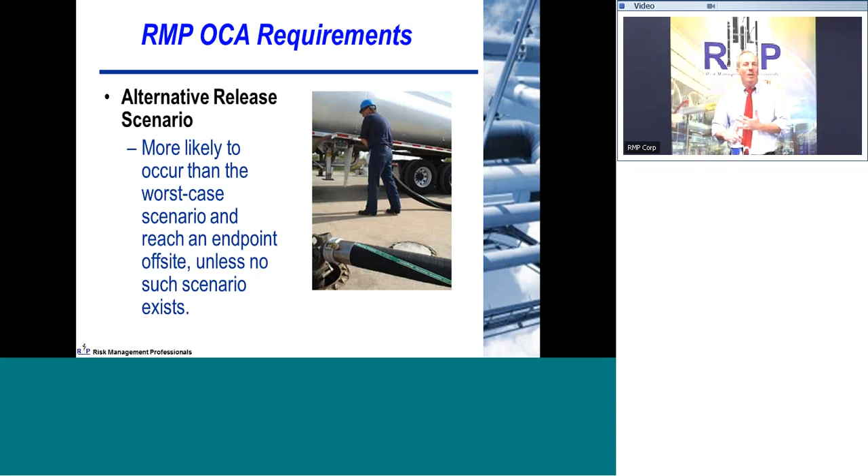So let's look at some of the specific requirements. What you're trying to do is really look at off-site population impacts. As you recall, process safety management is a requirement promulgated by OSHA, and it focuses on safety of plant workers. EPA's risk management programs and the state accidental release prevention programs focus on protection of the community based on EPA's jurisdiction and the other states' jurisdictions of protecting the community.

So the key element is determining these off-site population impacts. You identify a circle of concern, or how far out that impact can get, and then you estimate the population within that area. It can include residents, institutions, parks and recreation areas, and major commercial office and industrial buildings. Use of the most recent census data allows the population to be estimated.

And you're not supposed to analyze it to the individual. You don't have to drive around and look for daycare centers in your area. This is meant to give the regulator and you a perspective on what those impacts might be. And of course, the census data, the software that provides it, allows you to estimate to 2 significant digits.

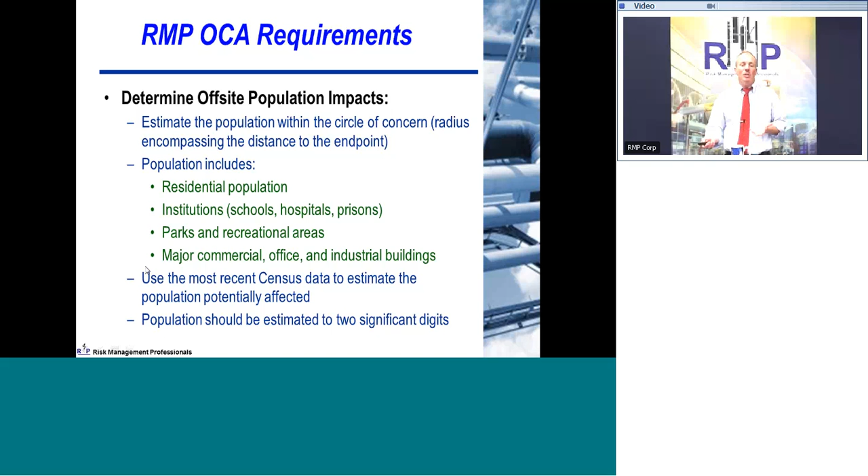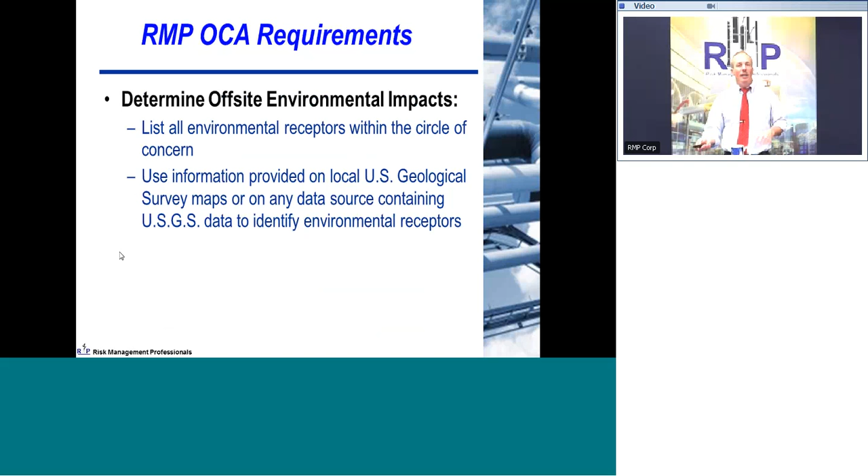That's a requirement. So as part of the determination of these off-site environmental impacts, you want to also identify environmental receptors. You can use information provided on local USGS maps or any other data source that gives you that kind of information in terms of environmental impacts. So you're looking at off-site population and off-site environmental impacts as part of the overall jurisdiction and responsibilities that the EPA and the state programs have.

Now, how does that impact with hazop studies? Again, all these come together—they're not meant to be individual, distinct, and disjointed programs. The hazop study facilitator, as they're doing these things, needs to understand consequence analysis.

It helps you identify important hazop study scenarios. If you're taking a team of 20 people running through it, and as a facilitator spending a lot of time and resources analyzing something that has just an operational blip on the process and may result in a few thousand dollars loss, that's not something you want to spend all these resources on. So understanding basic OCA concepts is super important.

The hazop study can also validate the kind of off-site consequence analysis scenarios that you choose, especially for the alternative release scenarios. Looking at things and having the team validate and say, oh, this could credibly occur during the life of the facility, we need to make sure that's properly analyzed—this can help you pick out and prioritize the 1, 2, or 3 scenarios that you might want to analyze as part of your OCA for the

alternative release scenarios. And also as a facilitator, although I've heard some facilitators go by the, gee, I'm just a facilitator, the team needs to understand what's going on—I don't agree with that. The hazop study facilitator needs to have a good technical basis to guide the team, to know when the team is going in the wrong direction, and understanding the chemical process, general process issues, and also off-site consequence analysis phenomenology really helps the facilitator do their job properly.

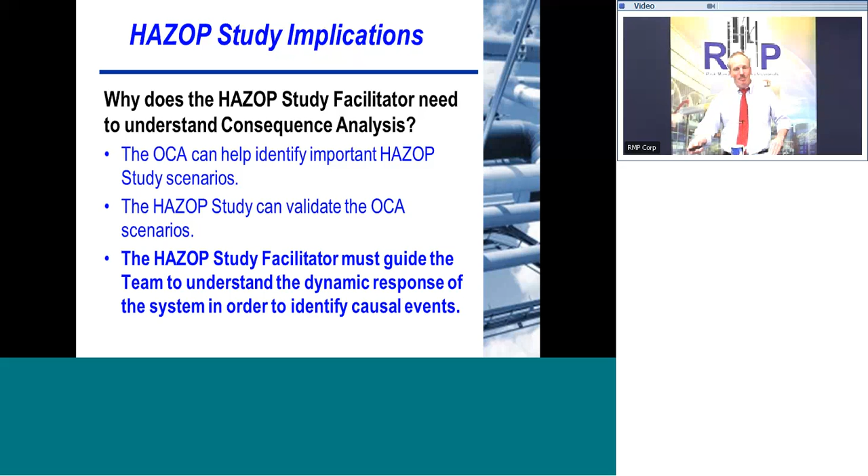When you're facilitating, you really need to be thinking about how does this scenario propagate, or does the team properly understand the ultimate consequences so that they're risk ranking it properly. So let's talk about general OCA modeling parameters.

When you're looking at toxics, you're looking at basic endpoints, or concentrations, levels of concern—we talked about that earlier. Toxic chemicals like ammonia, hydrogen sulfide have a certain amount of milligrams per liter, parts per million, different ways of representing concentrations that can cause potential health impacts.

The toxic thresholds that are chosen by the EPA are usually ones that don't cause an immediate fatality. Usually they're things that if somebody is in an area and gets exposed to it for an hour, there's a certain impact. In most cases, it's an impact associated with impeding their ability to respond or evacuate.

So that's what's picking and driving these concentrations of concern.

For flammables, explosions can yield overpressure events. An overpressure of 1 psi is a limit that's often chosen to have an impact, and we'll talk about that in a couple minutes. The radiant heat or thermal radiation effects, a radiant heat level of 5 kilowatts per square meter for 40 seconds is a typical threshold where you might have some impact, and you need to prevent those kinds of impacts.

Lower flammability limits, getting above a concentration where if it finds an ignition source that can cause a significant overpressure event, is often a level of concern that you pick so that you don't build up concentrations that can light off and cause either a deflagration or detonation.

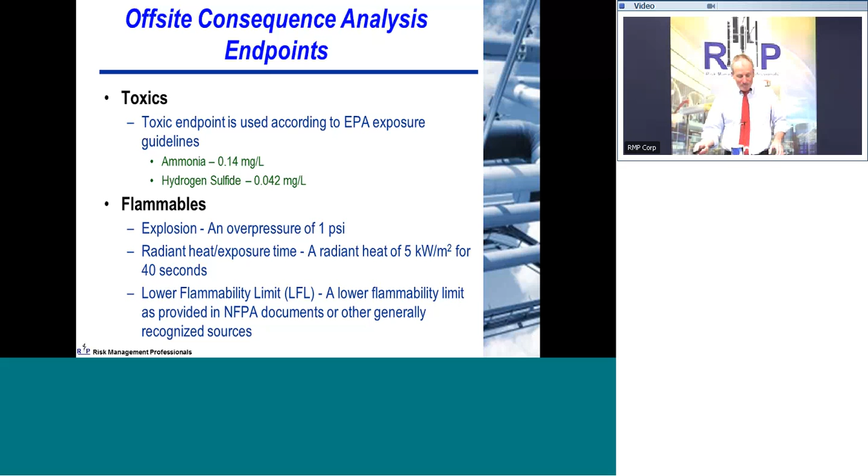Other issues and key parameters are wind speed and atmospheric stability class. For a worst case scenario, a lower wind speed and more stable environment is chosen, which allows concentrations to be maintained for long distances downwind.

For alternative release scenarios, less conservative, more realistic assumptions are chosen - a different stability class and a higher wind speed that is more representative of what you typically would see during a release - again to get a realistic potential impact so you can feed that into your emergency response planning.

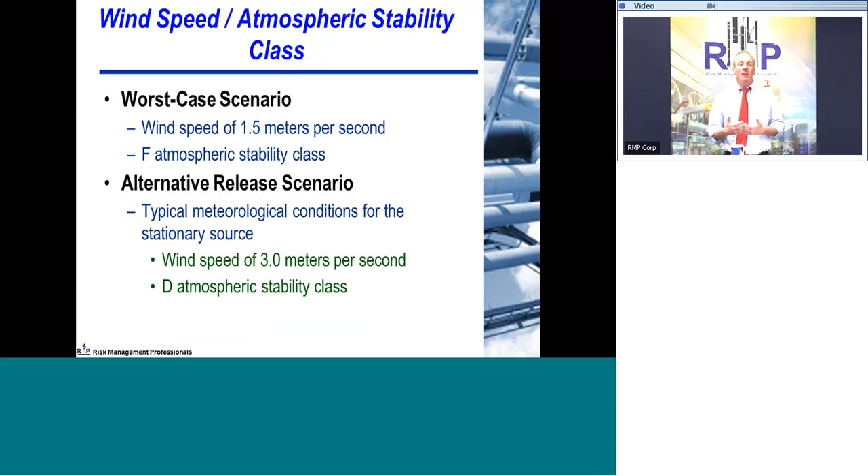Ambient temperatures and humidities are also key parameters that go into this OCA modeling. For the worst case scenario, regulatory requirements are the highest daily maximum temperatures for the previous 3 years. If you don't have those, they basically default to 25 degrees centigrade and 50% humidity.

For an alternative release scenario, you're allowed to pick typical temperature and humidity data from observations that may be made from a local met station, and you feed those in to identify what you're likely to see during an emergency.

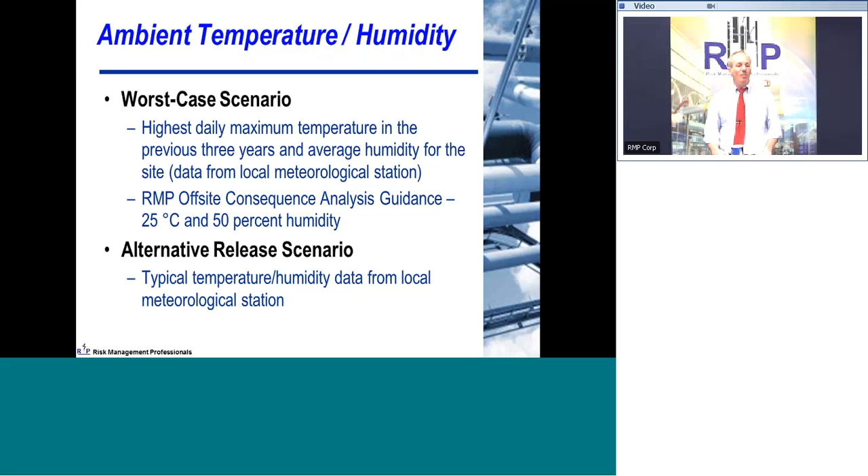Surface roughness is a term you may not have been exposed to before. An urban environment has lots of obstacles, things that cause a disruption in the flow of toxic gases, and what that does is mix things up a little bit, allowing it to disperse more easily, so it doesn't build up the concentration of toxic materials as far downstream.

Rural environments that don't have buildings, that may have flatter land for longer periods, allow higher concentrations to be maintained for longer distances downwind, and those rural environments can yield further distances to that endpoint or level of concern for your toxic chemical release.

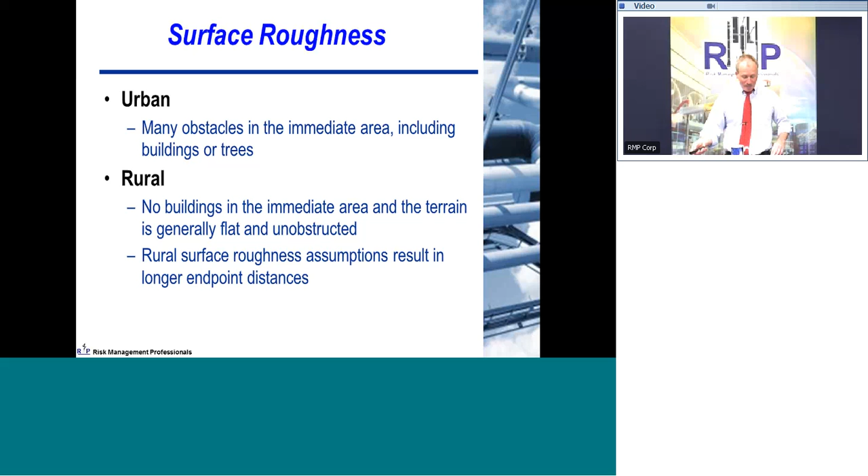When you're looking at these release considerations, the regulations have you split things up between passive and active mitigation features. Passive mitigation features such as dikes, enclosures, berms, drains, and sumps are allowable - that's physically there, so you can take credit for those kinds of features when you're looking at worst case scenarios.

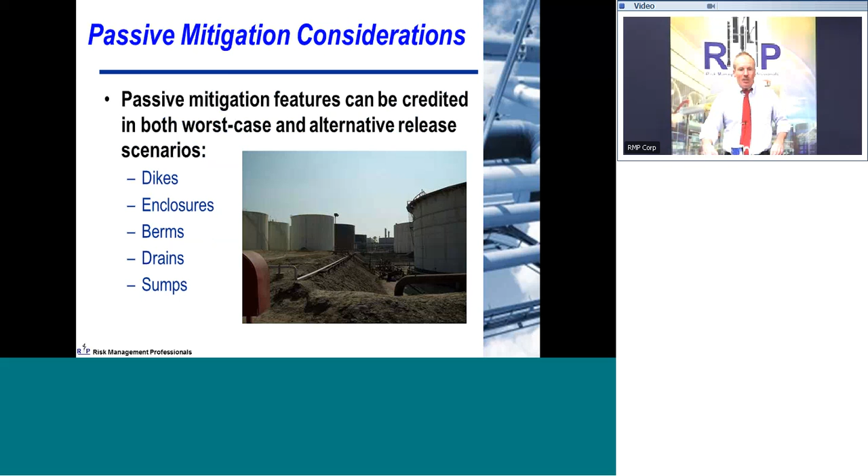For worst case scenarios, they do not want you to take credit for anything active - things like sprinkler systems, deluge systems, water curtains, neutralizing the material, excess flow valves, flares, scrubbers, or emergency shutdown systems that have to actively do something. These are not something the EPA or the state accidental release prevention programs want infused into looking at that release, because they don't want to have to count on these systems or think about how likely they are to work.

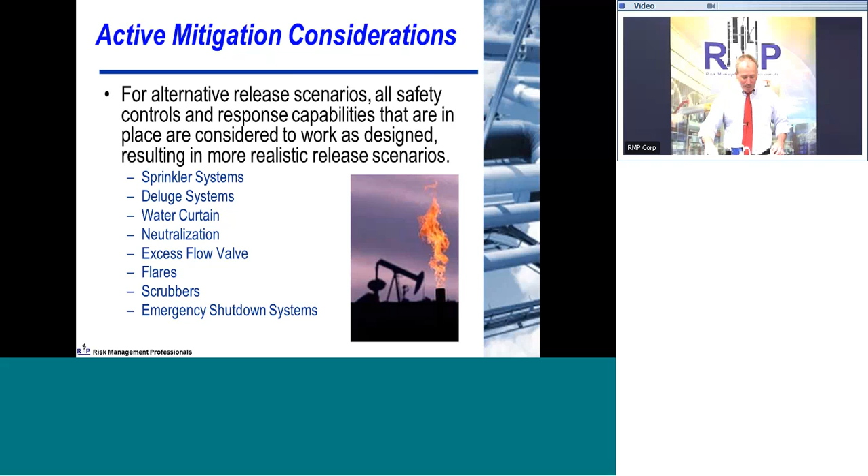They want to use the worst case scenario to characterize the potential hazard that facility poses to the community and to the environment. So let's talk a little bit more about flammables.

Flammables have, as we talked about before, a level of concern where if you find an ignition source it might light off, ignite, and form a detonation or deflagration. You have overpressure and thermal limits that you want to be concerned about to prevent injury of personnel and other propagating impacts.

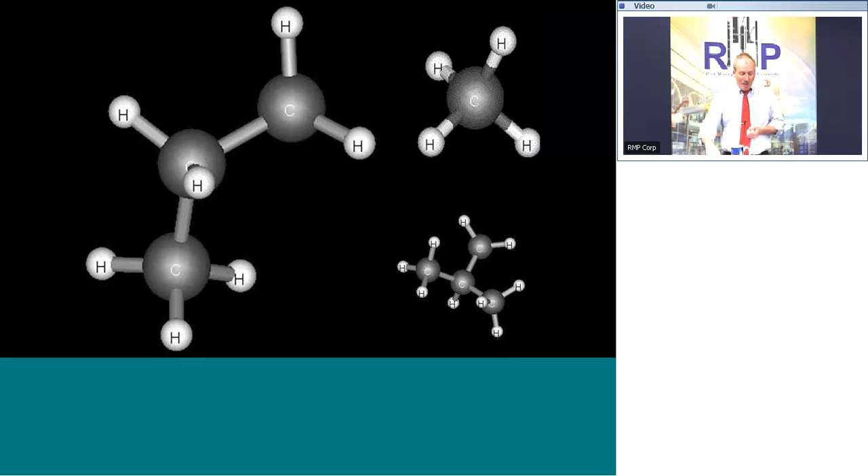Characteristics of these flammables that you want to consider are things that cause overpressure and thermal radiation impacts. For falling into these programs, there's usually a quantity that the EPA or the state accidental release prevention programs set so that if you're under that quantity, they consider it a relatively minor impact to the community, so you don't need to be covered as part of their program.

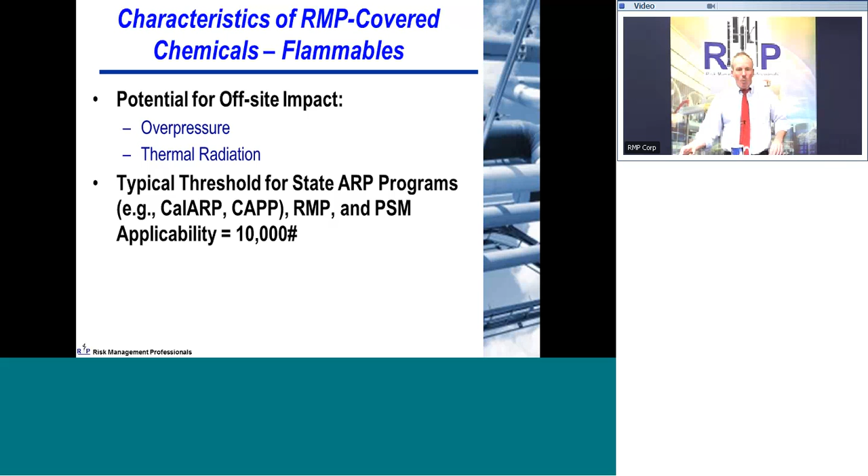When you're looking at the different chemical properties, things like molecular weight, boiling point, dispersion characteristics, vapor pressures, enthalpy of combustion, and lower explosive limits all come into play to help you identify the hazard.

On your screen, you're looking at some example properties for hydrogen, methane, propane, and butane. This gives some insight into how understanding those chemical properties can help you understand the hazard and make sensible decisions on where to focus in terms of off-site consequence analysis.

If you look at methane, propane, and butane, as molecular weight increases, you see that they're roughly proportional to the enthalpy of combustion, or how much energy comes out in terms of kilojoules per mole.

What that means is certain weights of material as they're released, when you're looking at it on a weight basis, you're getting similar amounts of energy that come out of that.

Understanding the boiling point can give you an idea of, if you have a release of this material, is it going to be a buoyant gas? Is it going to be a heavy gas? Will it stay a liquid? If it comes out as a liquid under pressure, is it going to rapidly volatilize and boil?

All these things come into play in terms of how you model the impact and what software you pick for it too. And of course, upper explosive limits and lower explosive limits give you an idea of where you might have concerns if it finds ignition sources.

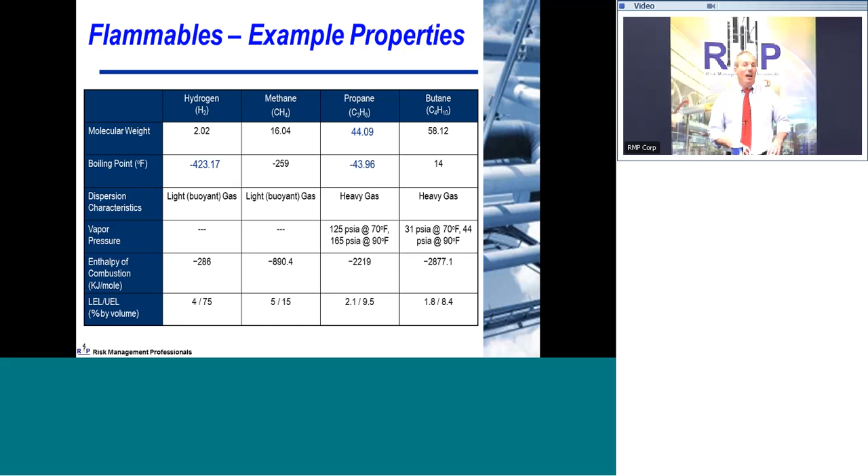Some example overpressure consequences. I'm not going to go through this, but this is just a handy reference table. Hopefully you can read it on your printouts of different pressure levels and what the impacts might be. And you can see why 1 psi is chosen as a generally applicable level of concern.

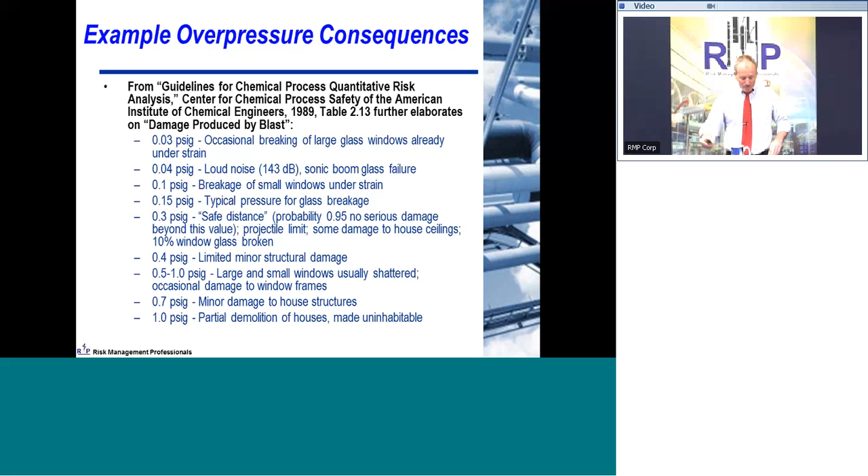Okay, so let's talk about release issues and what's actually going on. Basically, it's important to keep in mind that when you're dealing with flammables, you need to have not just the fuel that you're dealing with, but also oxygen for it to react, and also some sort of energy source or ignition source to get it started.

So when you're looking at the overall hazard, whether you're doing off-site consequence analysis or folding into a hazop study, you really need to think about: I've got the potential for release, or I've got a fuel source. Is it able to find oxygen, and is it able to find an ignition source?

Beyond that, even if it finds an ignition source, not everything translates into releasing the kind of energies that we just spoke about when we look at the enthalpy of combustion.

When you're looking at a total quantity of this flammable substance, yeah, even for the worst case scenario, you want to look at it forming a cloud and then finding something to ignite. But only 10% of the material typically participates in the explosion from these worst case events and those kind of worst case assumptions.

When you look at it on a more realistic basis, you see for a vapor cloud explosion, typically a 3% yield factor for the total amount of material released is usually more realistic, and things that are observed when releases have occurred in the past.

Also, again, keep in mind that it's got to find the oxygen and ignition source, and not everything in the cloud will be in the flammable range. That's why not everything translates into releasing the total potential energy associated with that cloud.

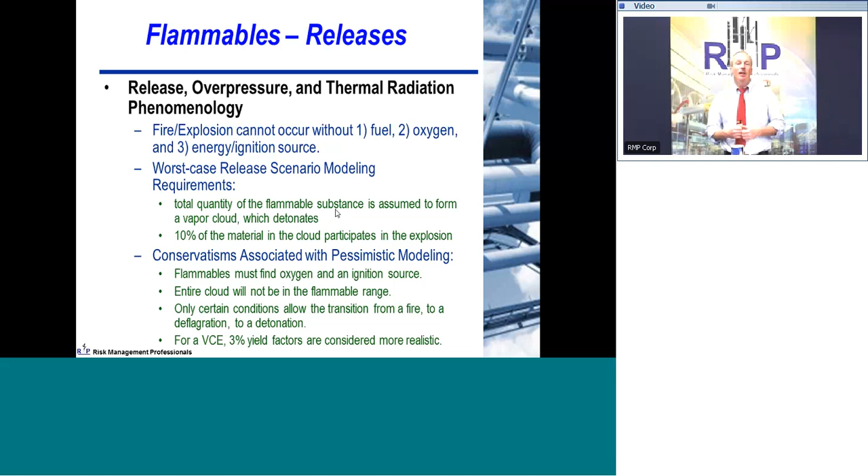When you represent these overpressure impacts, just as if you're looking at a toxic release, usually overlay that on a map and identify an isopleth or a general area or boundary, where past that boundary you don't have the kind of overpressure impacts or thermal radiation impacts that can impact buildings or injure individuals.

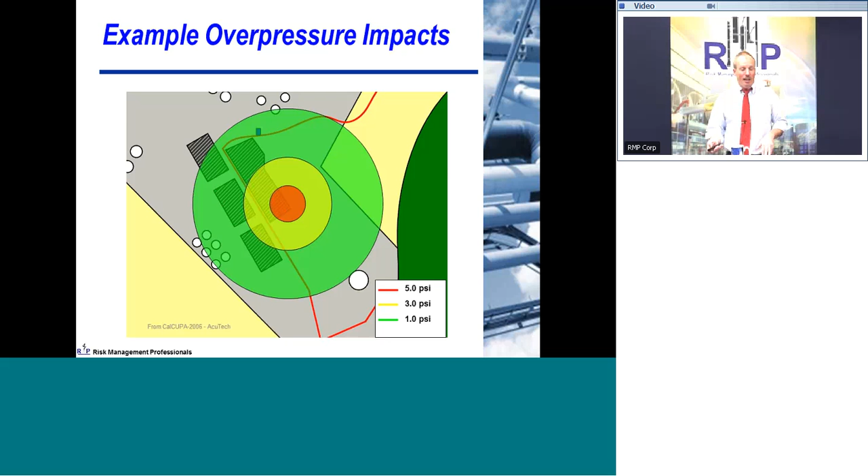So just like when you're looking at toxic releases, you'll overlay the results of your flammable release calculations and the off-site consequence analysis onto a map in that isopleth form.

So let's talk about toxic gas releases and general modeling considerations and the kind of things that are associated with the phenomenology. When you're looking at airborne toxics, that's usually what the concern is for the EPA and state ARP programs, because their jurisdiction is protecting the community. How can the community get impacted from toxics?

Usually if it goes airborne, such that it can cross the site boundary and actually impact individuals. So the chemicals of concern are usually ones that can volatilize, go airborne, and have a potential for acute health impacts.

They're typically a vapor at ambient temperatures. If you're dealing with something that's typically a liquid at ambient temperatures, it's not likely to go very far. So you're looking at very low concentrations of vapor, and then for that low concentration of vapor, how does it disperse?

So in many cases, the potential for hazard for things that aren't a vapor at ambient temperatures is very low. In some cases, especially because of reactivity concerns and a history of people being concerned about things like cyanides, small releases of small particulate solids may also be of interest and may be encompassed by some state accidental release prevention programs. Again, you're looking at what you need to be concerned about: toxic concentrations beyond the fence line.

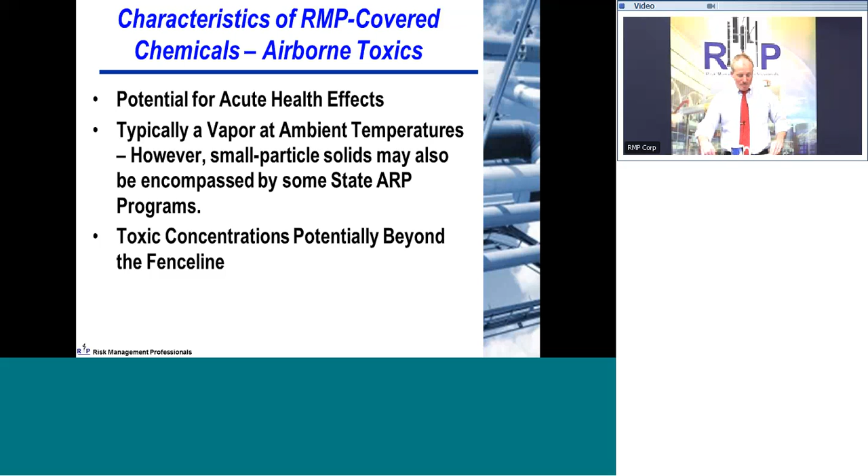For a buoyant gas, it will typically continue to go up and spread both horizontally and vertically. For a heavy gas, whether released under cold conditions or just having a high molecular weight, it can sink and slump as it's continuing to disperse. In some cases, if the wind is very low speed, it can actually go upwind because as it's slumping and dispersing, it has the ability to go counter-current to the wind due to gravity effects. So all these things are things you want to think about conceptually when choosing the right atmospheric dispersion model, when looking at releases of buoyant gases versus heavy gases, and a realistic consideration of the hazard.

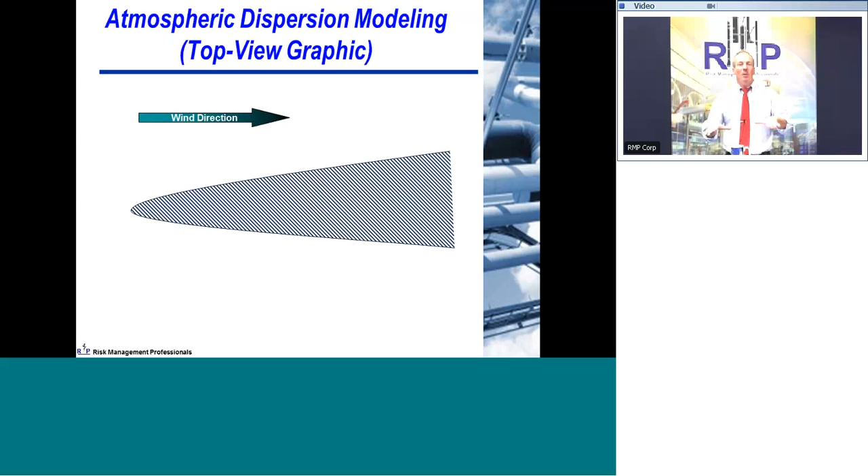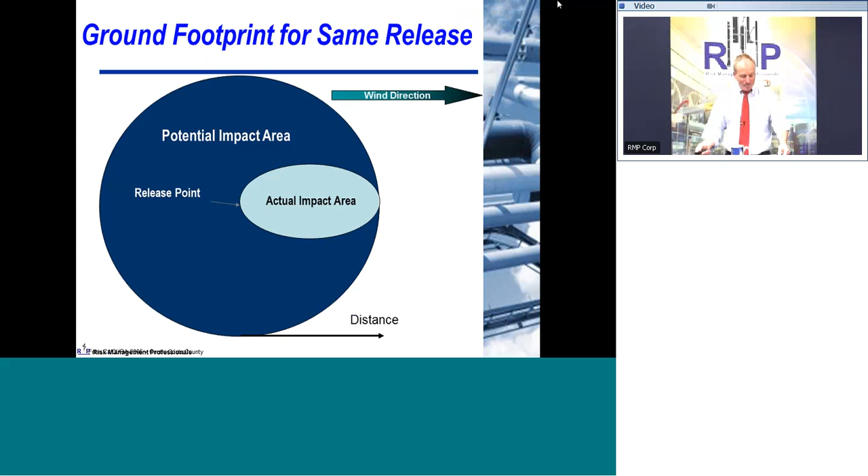So key parameters for all atmospheric dispersion calculations, also for toxics, are temperature and wind speed. Higher wind speeds allow for faster movement and faster dispersion, building up lower concentrations as you go downwind.

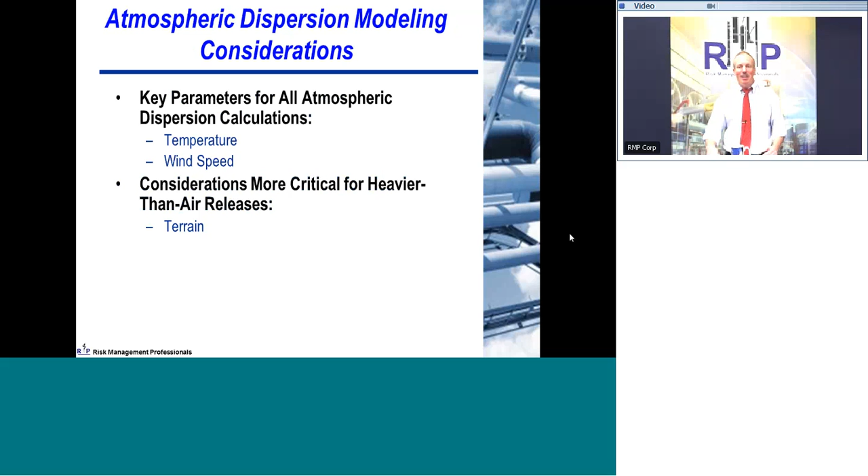And then when you consider heavier than air releases, you have... is your screen keeping up? Okay, good. When you're looking at heavier than air releases, you're looking at terrain effects, surface roughness effects...

Understanding all these different phenomenology, especially for heavier than air releases and the models that you use, can be very important.

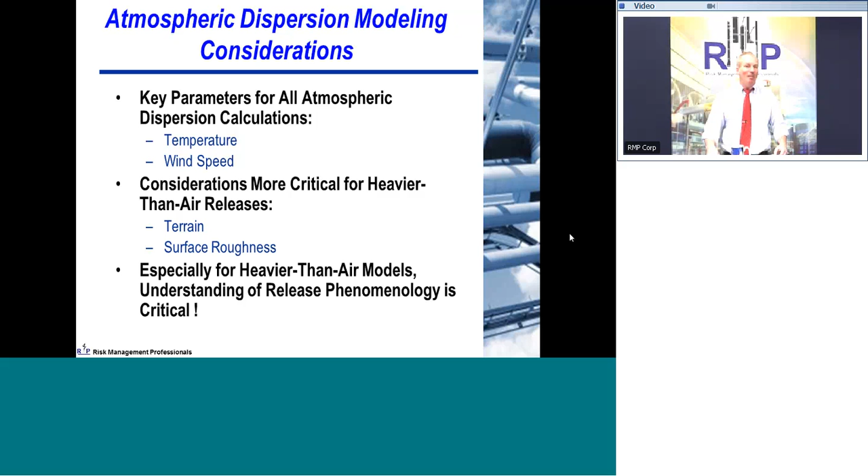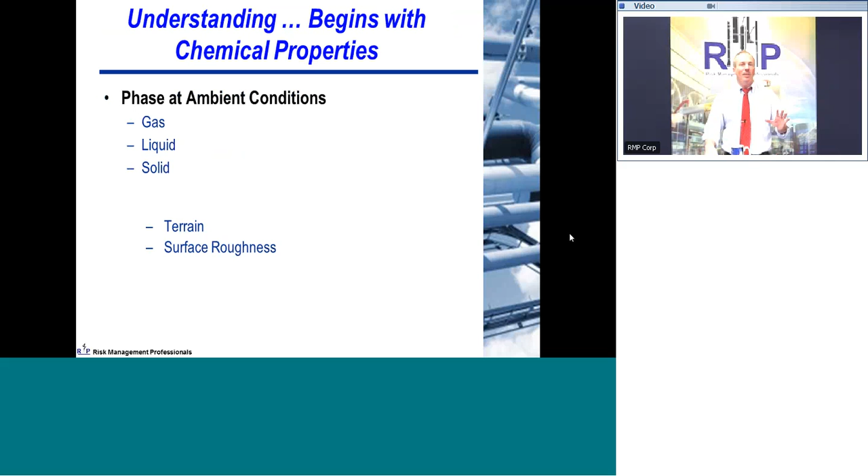Okay, so let's talk a little bit more about release phenomenology and then get into some specific examples. First thing you want to consider, as I hinted before, is what is the phase of the material at ambient conditions? Whether it be flammable or toxic, is it something that wants to be a solid at ambient conditions and pretty much doesn't want to go anywhere in terms of getting off-site?

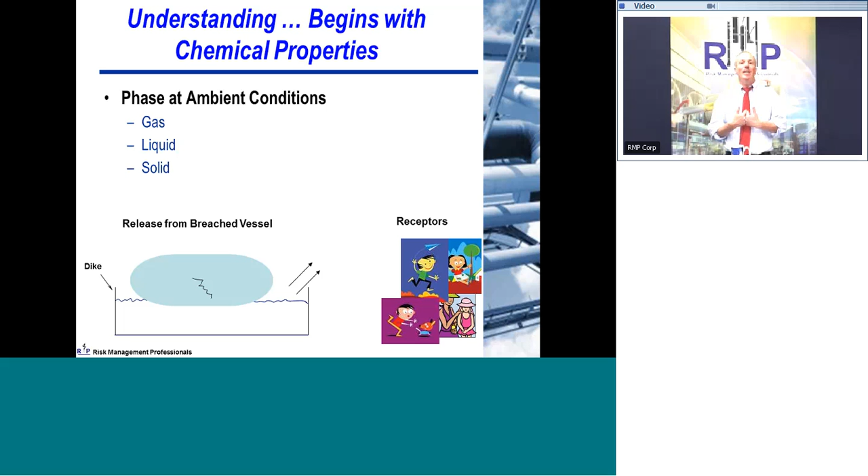Is it a liquid that can spread out, have maybe an environmental impact, but be less likely to go across site boundaries and impact people? Or is it something that wants to be a gas at ambient conditions, such that even if it is released as a liquid, it's going to rapidly volatilize, vaporize, and then want to go off-site? These are the kind of things in this little sketch in the lower left. If you breach a vessel, whether the vessel's at high temperatures or high pressures, a key consideration is what the material wants to do at ambient conditions once it is released.

Those are the kind of things that emergency responders have used for a long time to characterize those kinds of hazards. Those are actually, not coincidentally, quite useful to the individual who's trying to understand the hazard and model it using off-site consequence analysis, because it's really the toxicity effects that you need to be concerned about. Things that have a higher toxicity rating are going to be of more acute interest if it goes off-site.

Things that have a higher flammability rating, and things that are reactive, can also get in trouble and cause other problems that can release toxic materials and have a potential off-site impact. This fire diamond that's been with us for a long time is actually a good first cut at understanding the kind of things that can occur if you have releases of toxic materials.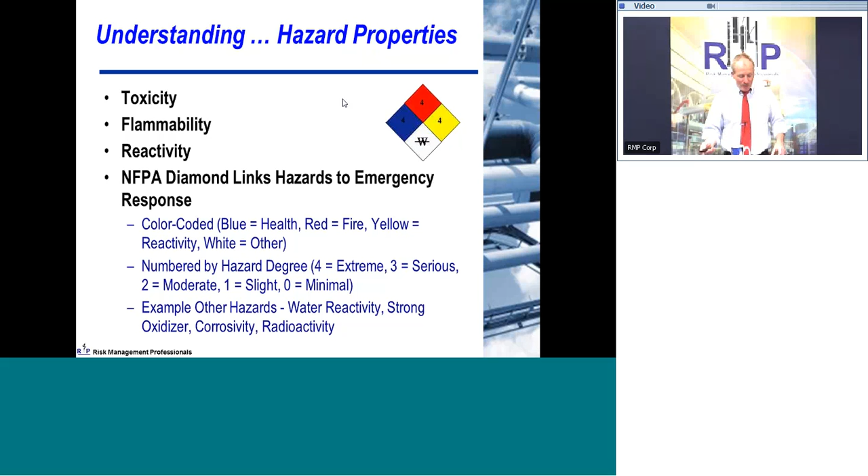Understanding the process conditions: if you get something mixed with a volatile material, if it's at high temperatures, if it's at high pressures, even if it wants to be a liquid at ambient conditions, under very high temperatures and pressures it can still, with a catastrophic release, go airborne as droplets and become extremely volatile. So these release mechanisms, leak size, leak location, and process conditions can be extremely important when you look at the overall impact of the release.

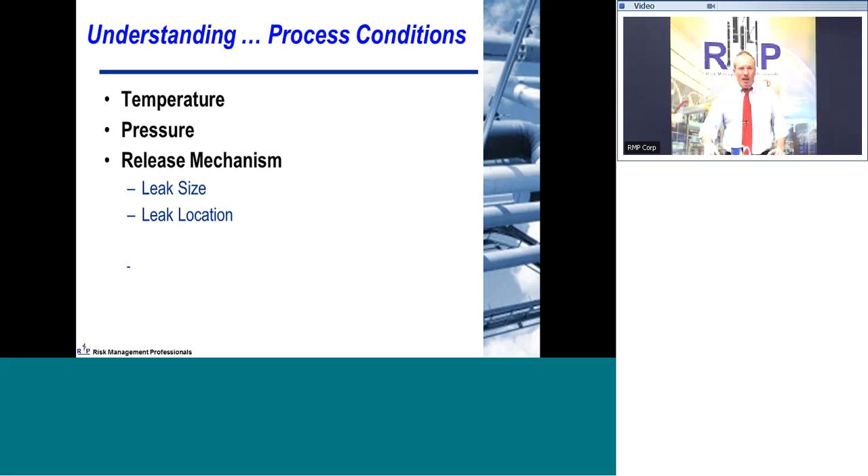The types of things you need to model are buoyant gases or evaporative pool releases, horizontal or vertical jets. That tells you how much material is released. Then, because it's buoyant, you use a Gaussian dispersion model and look at how far it goes as it spreads both horizontally and vertically.

Even if it's released at an elevated location and it's a buoyant gas, it's going to diffuse vertically as well as horizontally, and you can get toxic effects downwind even at ground level where people are. Also recognize that if you have an elevated release of a buoyant gas, your neighbors may be in multi-story houses or apartment buildings with many stories. Where your receptors are with respect to the release height is also an important consideration.

For heavier gases that are denser than air at ambient or release conditions, for example ammonia, which has a molecular weight of 17, under release conditions it's typically cold. So even though it's a lower molecular weight than air, which is typically 29, it can tend to sink and become a heavy gas because it's very cold at the point of release. That's why ammonia gets a lot of attention when looking at toxic gas releases.

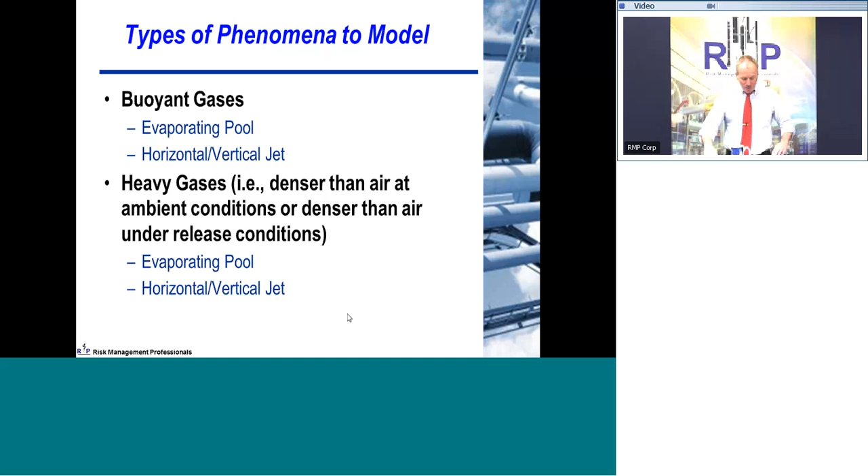So again, for heavy gases, you may have to model an evaporating pool if you've got a large release of material into a diked area, for example, or if you get a release in the vapor space, a horizontal or vertical jet.

Other types of phenomena that you may need to model, maybe not as common, are pressurized liquid releases, liquid spills of a pure substance, a spill of a solution, a vapor cloud fire or explosion, a BLEVE (boiling liquid expanding vapor explosion), particulate releases, which we'll talk about in a few minutes, and reactive chemicals: is it going to react with water in the air, or with other chemicals nearby? All these things need to be considered with respect to the kind of release you've got, and it may come into play with the types of models that are chosen.

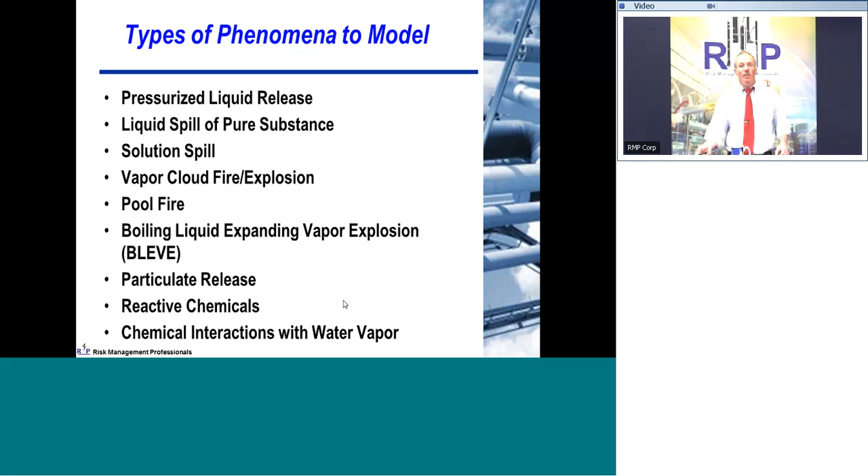There's a variety of different models, from simple ones where you give it a few parameters and get an answer, to very complex models where you need to really understand a lot of the chemical properties involved. As the person doing the off-site consequence analysis, you need to understand what level of detail you need in the results, what kind of phenomena are really important during a release, and that helps guide the level of detail, the amount of effort you put into the analysis, and of course what software you choose.

On the left-hand side of the screen, I've identified a lot of common software packages. The reason there are many software packages for offsite consequence analysis, and this is just a snapshot, is that for different situations you may want different levels of detail, and you may have to model different parameters or different types of toxic or flammable material releases.

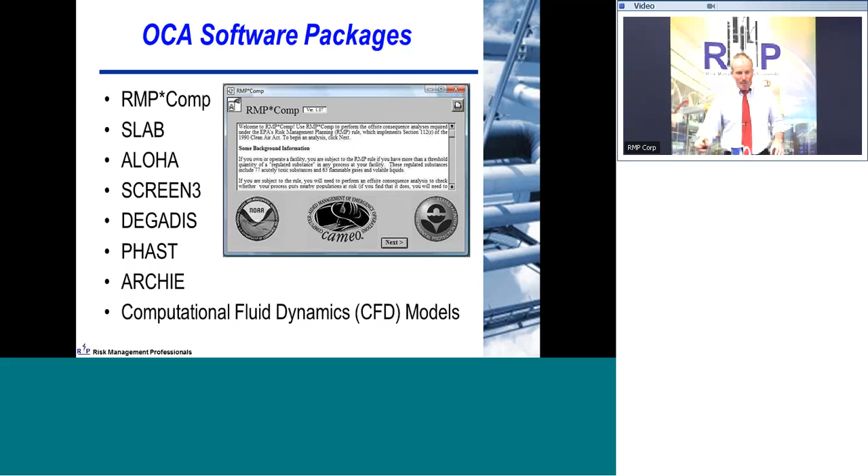Let's look at a couple of examples that illustrate this consequence modeling and how you might apply it to different substances. First, let's look at ammonia, a very common substance used in refrigeration, selective catalytic reduction, water chemistry, pH control, and many other uses. It's been with us for a long time, its properties are very well known, and it's used in most communities throughout the world. It's important to understand its potential hazard and how you manage and control those hazards.

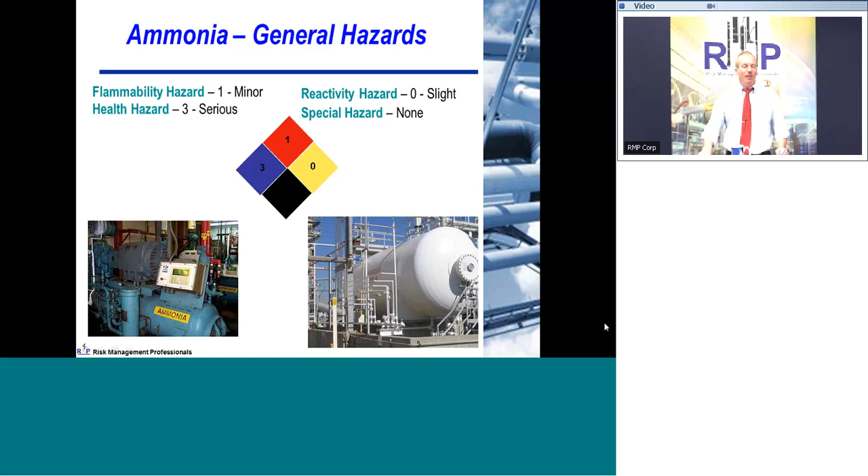When you look at properties, it's got a low boiling point, which makes it a really useful refrigerant, but it also means that if there is a major release, it's often going to be at cold conditions. If you get a large liquid spill on the ground, recognize that it has the potential to volatilize very easily as heat from the environment transfers into the ammonia spill.

One of the things to really consider is application of water. I've talked to many emergency responders and plant site folks who are aware of the affinity of ammonia for water, and if there's an ammonia release, they'll want to knock it down with a fire water monitor or some sort of fogging mechanism. All well and good, but if you start applying water directly into the ammonia spill, which to some people makes sense because, hey, let's dilute the ammonia and it won't have that impact...

What you're really doing is taking water at ambient conditions, much warmer than minus 28, and putting that into the liquid ammonia that's been spilled. If you do that, you're rapidly adding heat into the ammonia, and what's it going to want to do? It's going to want to vaporize. So you've got a real concern that if you add large quantities of water to an ammonia vapor or liquid spill, it can volatilize rapidly, flash back on the emergency responder, and release a lot of ammonia very quickly. Understanding these properties is important not only for analysis, design, and protection, but as an emergency responder, it's critically important.

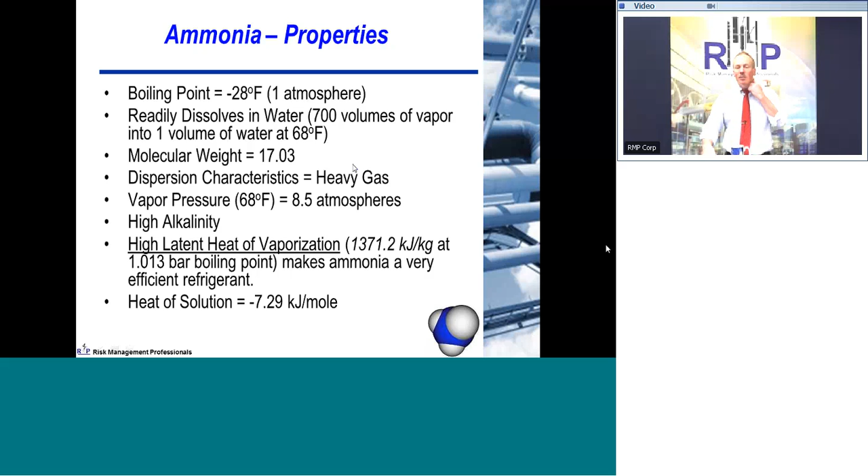This is just an idea of the saturation properties. If you look at 1 bar of pressure, 1 atmosphere, basically 14.7 psi absolute, you'll see that it crosses that at minus 28 degrees F, and that's basically the point we just talked about for the boiling point.

Recognize that as ammonia disperses in air and its vapor pressure lowers, it can go below that minus 28. So you want to be cognizant of that as an emergency responder. I've heard many cases where emergency response personnel, even with proper protective equipment, notice that their protective clothing—often polymeric, meant to be impervious to ammonia vapors—starts to become very non-ductile and brittle as they're working the emergency. These are things you want to keep in mind when understanding the properties of ammonia.

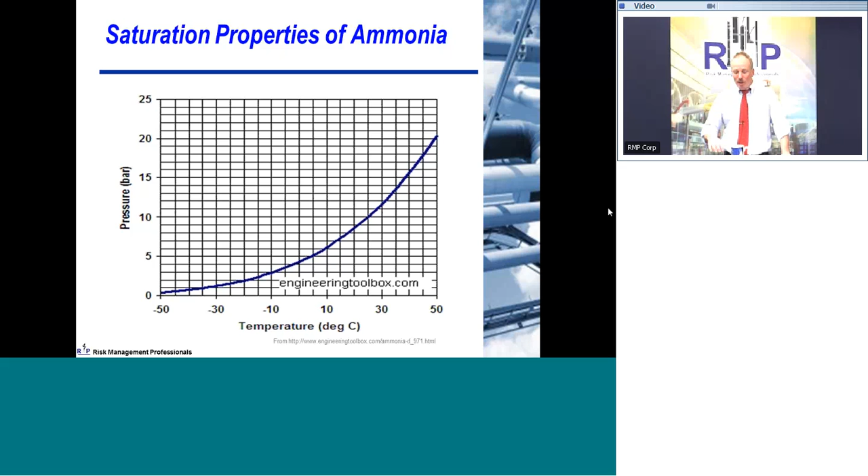When you're looking at release phenomenology, for all chemicals with boiling points below ambient conditions, if you have a liquid spill and vapor comes off, it's going to take heat away from the liquid pool, and that liquid pool will stay there for a long time, but the amount of vapor coming off also decreases with time. You can use that to get a more realistic appreciation of release rates and the concentration that can build downwind.

We talked about partial pressure of ammonia in the air. One thing to keep in mind is when you're looking at an ammonia release, often it's reacting or helping condense water in the air, so you're actually looking at water droplets rather than the ammonia. It gives you a visual indication of the ammonia release.

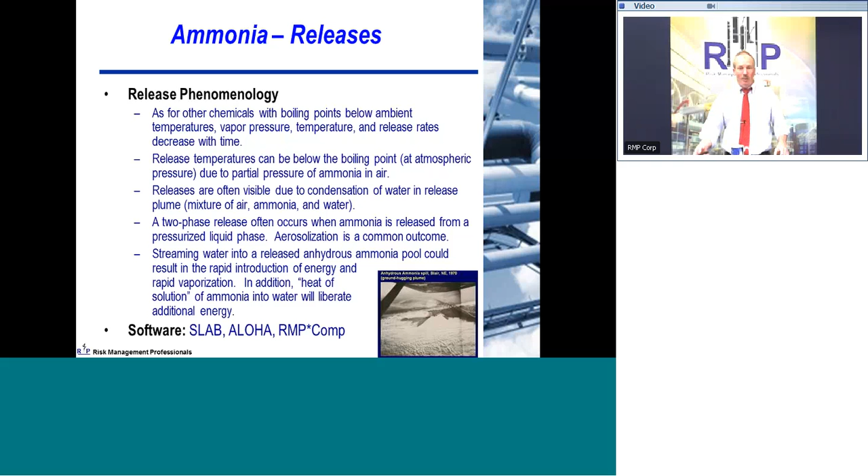Also, when you're releasing it in liquid phase, it's going to volatilize often as the pressure goes down. If you've got a breach in a vessel at fairly high pressure, as the liquid comes out, it's going to want to volatilize, which means it rapidly breaks into droplets in the air and forms an aerosol in many cases that hugs the ground and maintains high concentrations of ammonia very low to the ground. Software that is good for modeling that includes SLAB, Aloha, and RMP Comp, very good for modeling episodic releases of anhydrous ammonia.

This is the cross-section we looked at earlier. This definitely applies when you're looking at anhydrous ammonia releases. Basically, you can get a vertical jet, a vertical release, and if it's cold, it can sink. It can even go upwind. So if you're an emergency responder, noting the wind direction is important. Also note the temperatures. If the wind speed is low, you need to be very careful about where you position yourself and emergency response equipment to minimize potential exposure effects.

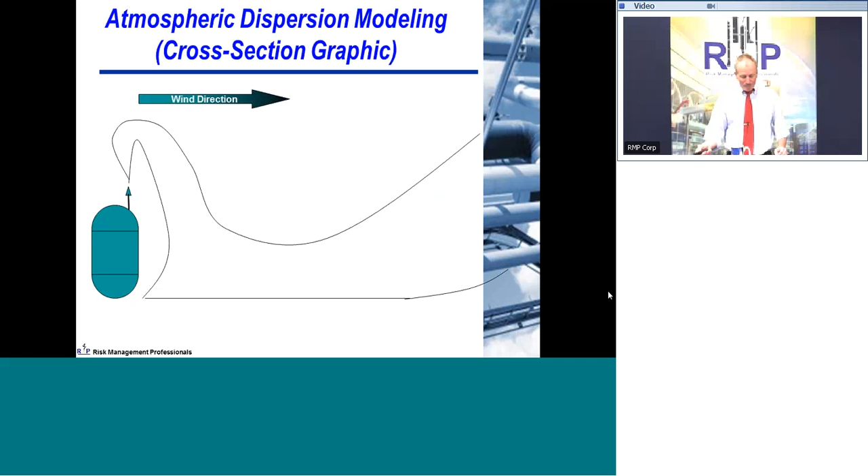So we've looked at anhydrous ammonia, basically ammonia in pure form. It's often used for selective catalytic reduction, pH chemistry, and certainly ammonia refrigeration. It's also used for farming, basically fertilizers that can be applied. In all those cases, you can use the pure form, anhydrous ammonia.

In some cases, selective catalytic reduction and pH control, you can use it in a form where it's mixed with water as aqueous ammonia. When you mix it with water, because of its affinity, it doesn't want to release as much, it doesn't want to volatilize as well. So it's inherently a lot safer material to use for those applications where you can. Obviously for refrigeration, except in very unusual types of systems, you really need to use anhydrous ammonia for common refrigeration applications. So, general characteristics of aqueous ammonia.

It's simply ammonia in a water solution, and it's often sold as 19.5% concentration. Not a coincidence: the EPA threshold of interest is 20%. So a lot of people do this to get into the range of being an inherently safer substance and not having to deal with concentrations that kick it into the regulatory requirements associated with risk management programs.

Now, something to consider: even though it's aqueous ammonia, it behaves a lot different than anhydrous ammonia, but the toxicity issues, the vapors that come off, it's still ammonia. It's still NH3. It's still something that causes acute toxicity effects to people. So when you're looking at release phenomenology, it behaves quite a bit different than anhydrous ammonia, but when you're looking at the actual toxic effects of the concentration of ammonia in air, it's the same material. You're not dealing with a different chemical.

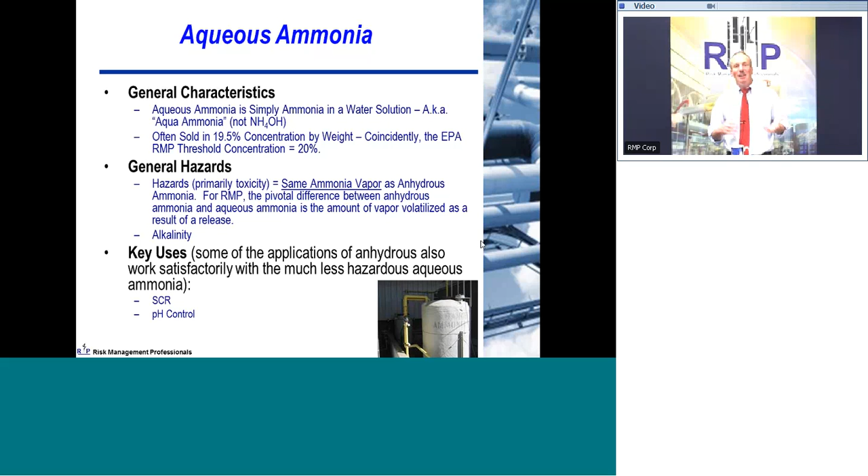And I mentioned some of the key uses before. When you're looking at releases, the differences in release phenomenology are why a lot of people use aqueous ammonia. Pound per pound for the amount of ammonia you get, obviously you're paying a lot more if you're using it industrially because you're really buying a lot of water that comes with it.

So again, it's behaving differently. The vapors that evolve from the liquid surface, if there's a spill, are a function of the concentration in water, the pool surface area, temperature, wind speed, and also time. But in all cases, the amount of ammonia that volatilizes off of an aqueous ammonia pool is going to be a lot less than an equivalent anhydrous ammonia release. And also, if you're releasing vapors off of, say, a blanket gas in a tank of aqueous ammonia, you're dealing with a fairly low vapor pressure, much lower than anhydrous ammonia. So the amount of material volatilized is a lot less.

It's got that affinity, it wants to stay with the water. So when you look at a spill from a tank of aqueous ammonia, it goes into a diked area, usually you've got a dike around there, and that solution of ammonia basically stays within the dike area. It's not frothing, it's not rapidly volatilizing or boiling off, but you do have a vapor pressure of the ammonia that drives the amount of ammonia vapor coming off the top of the solution. That is what gets fed into your dispersion model, and then you look at the offsite impacts.

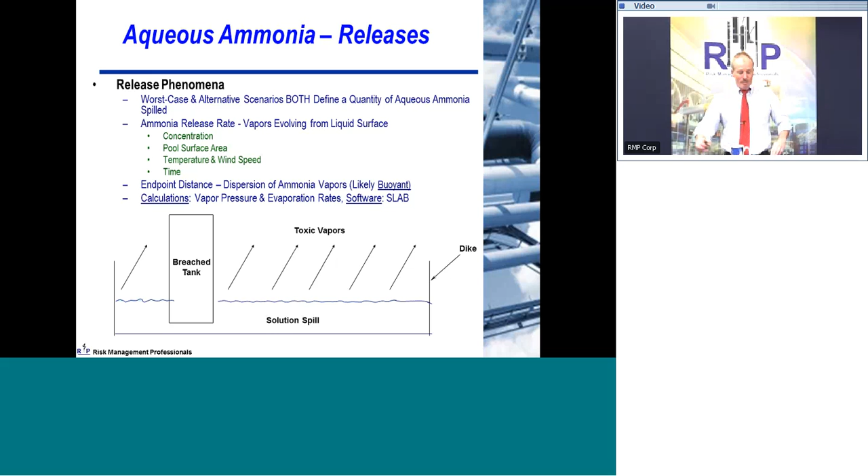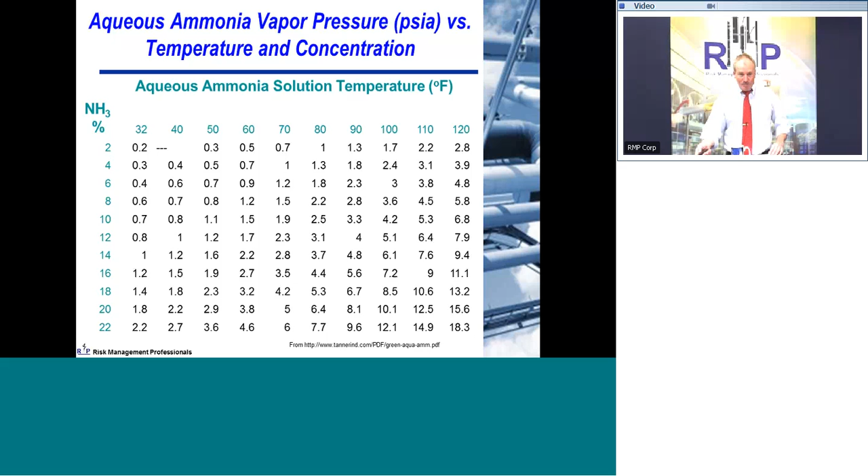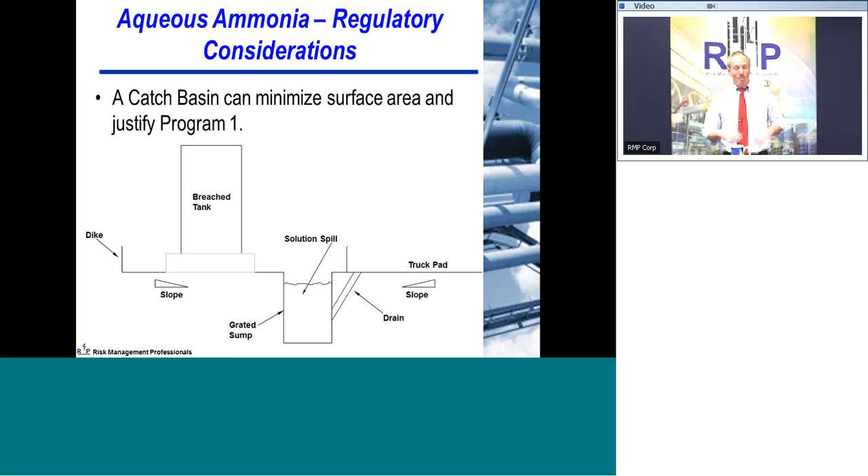When you're looking at regulatory concerns, what I want to share with you is the catch basin concept. Basically, a catch basin can minimize surface area. If you've got an aqueous ammonia tank and there's a breach that goes into the diked area, what's really driving the potential offsite impact is the surface area of that solution spill. So if that solution is directed into a containment or catch basin, something a little deeper that minimizes surface area, it allows a lot more time for emergency response and disposal of the liquid, and minimizes the amount of vapors coming off the top of that spilled material. By doing that, you minimize offsite impact, and in a lot of cases, you can decrease the offsite impact to the point where you don't necessarily have to do the depth of regulatory programs you would otherwise if you had a very large surface area causing greater offsite impact.

Another key consideration for ammonia, especially anhydrous ammonia and other materials with very high vapor pressures, is liquid-filled piping that can get blocked in. Often the anhydrous ammonia liquid is below ambient conditions, so if you block it in -- and most refrigeration engineers understand this and try to avoid it -- what I want to explain is that if you've got cold liquids with high vapor pressure blocked in and isolated on both sides of, say, a piece of piping, it starts to warm up to ambient conditions. As it warms up, it wants to expand, exerting pressure on the sides of the pipe, and it also has a higher vapor pressure.

So when you're looking at that thermal coefficient of expansion and the increase in vapor pressure, you can rapidly build up pressure inside that piping, which puts significant tensile stresses on the walls of the piping, and in many cases can lead to rupture. It depends, of course, on the temperatures you started with and the temperatures it builds up to. Is the piping exposed to sunlight? Does it get really hot? All these things factor into how to deal with that.

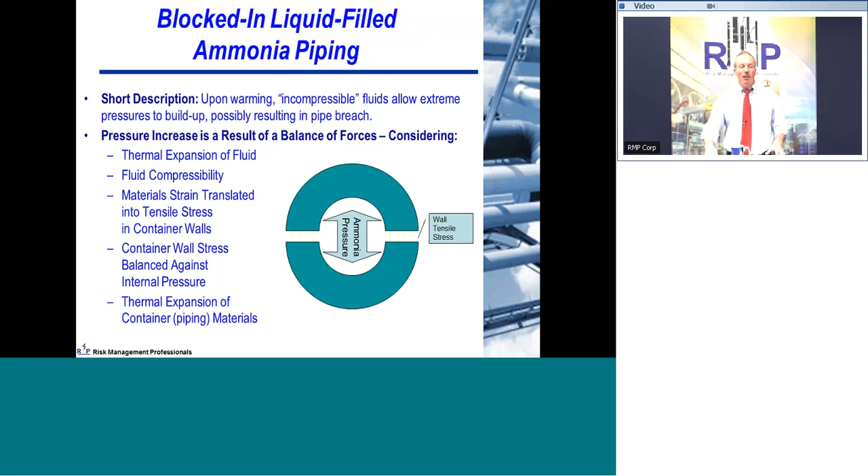As a designer and operator of a facility that deals with anhydrous ammonia, you want to make sure you minimize the potential for blocking in liquid anhydrous ammonia such that thermal expansion and vapor pressure can build up to the point of rupture. On the next page, I provided an equation illustrating how these things relate. The change in pressure is basically a function of the difference in the volumetric coefficient of expansion of the pipe versus the material in it -- usually the pipe can't expand as fast as the material -- as well as the vapor pressure buildup. It's directly a function of the temperature change, from what it started as to what it ends up with, if it's exposed to sunlight or just builds up to ambient conditions.

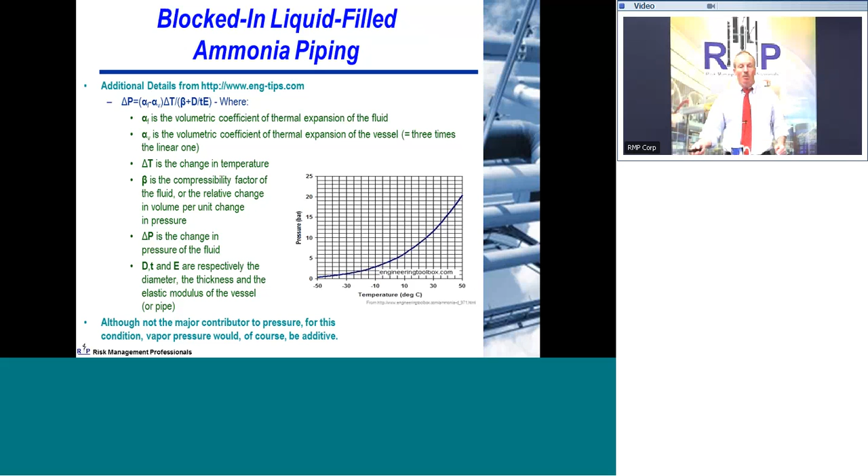You also need to build in the compressibility factor, and what you get from that is the pressure increase in that pipe. If that pressure increase exceeds the tensile strength of the piping itself, that's when you can get a rupture. For ammonia piping and other materials, these are the kind of things you really want to avoid, and understanding the physical phenomenon and chemistry behind it can be very important.

I've illustrated the differences between ammonia, anhydrous ammonia, and aqueous ammonia and their uses, because it illustrates the range of things that can go on with respect to process conditions and off-site consequence analysis.

What I want to briefly mention is solids. There are solids like cadmium oxide, potassium cyanide, and sodium cyanide that have an acute toxic health impact. In a lot of cases for these accidental release programs, you need to be worried because of the small particle size that can get off-site and disperse. Typical hazards are inhalation, ingestion, and skin contact.

There are ways to model them, less common applications, and you've got to be very careful. You also have to consider how you get the material off-site. One way is a breach of the container or something that drops, and its impact on the ground provides an airborne release fraction that gives you a source term, or a starting point for how much material can be picked up by the wind and go off-site.

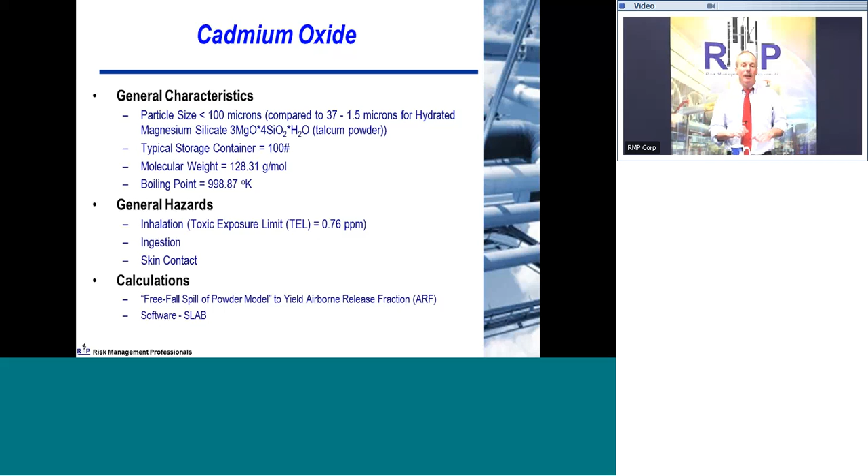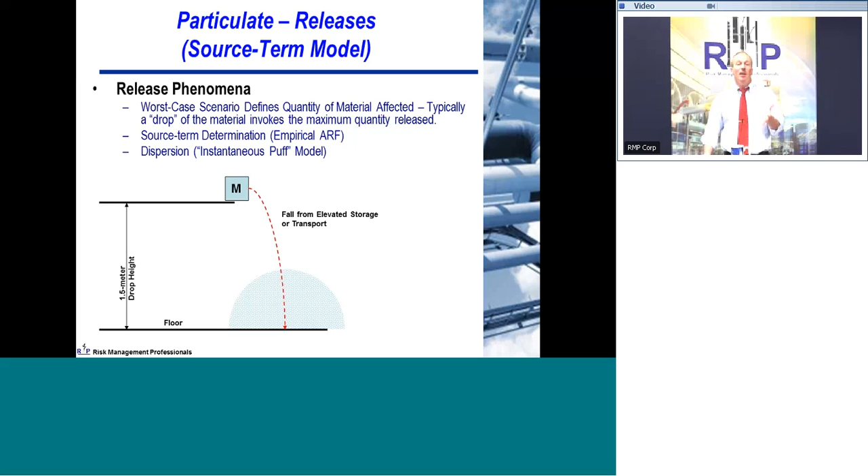So you need to look at several types of phenomenon: the airborne release fraction, the wind speed, and what these small particles do as they disperse off-site, which gives you an appreciation of what the toxic concentrations can build up to. These are the sort of things you may also need to model. It can be very different from gas releases, even though as particle sizes get smaller and smaller, they behave more and more like a gas in terms of their ability to travel distances.

So you've got particles, and you have to have some ability to get them airborne and have a source term. You've got a dropout rate due to gravity, and based on particle size, with very small particles you might actually have dispersion characteristics that conform more to a buoyant gas than a lot of other things. So a lot of things come into play, and you have to be very careful with this.

Also keep in mind that the dispersion of the material may not even be the most important issue. Even though state programs may pick up things like sodium cyanide as important issues that can travel off-site, one of your major concerns is potentially mixing it with acids, which can cause a reactivity hazard. The acid mixes with the sodium cyanide and you can generate hydrocyanic acid, basically HCN, which is used in gas chambers and at very low concentrations can have very acute health impacts.

Keep in mind that in a lot of cases you have to evaluate hazards and dispersion based on what the regulations require, but in many cases you need to go beyond that. Consider reactivity hazards, what else can be going on, and factor that into your overall hazard assessment.

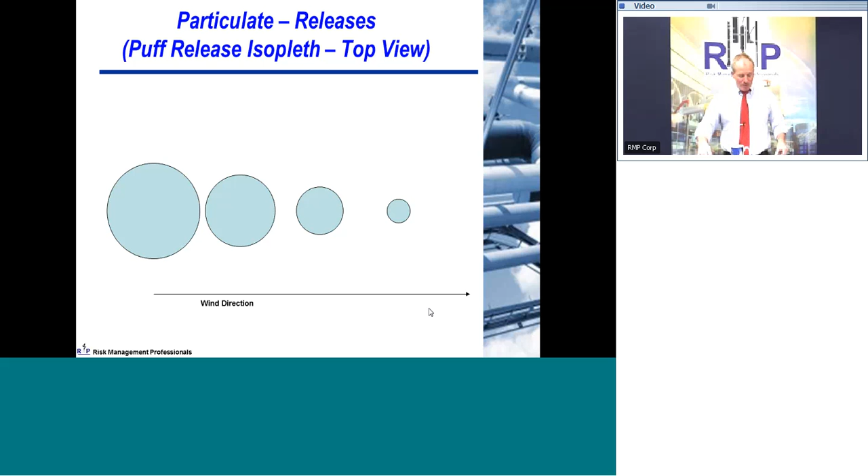So what I've tried to do is get into some of the details behind some common chemicals and what happens when they're released, and put that in the framework of understanding this offsite consequence analysis as part of the big picture in terms of understanding risk.

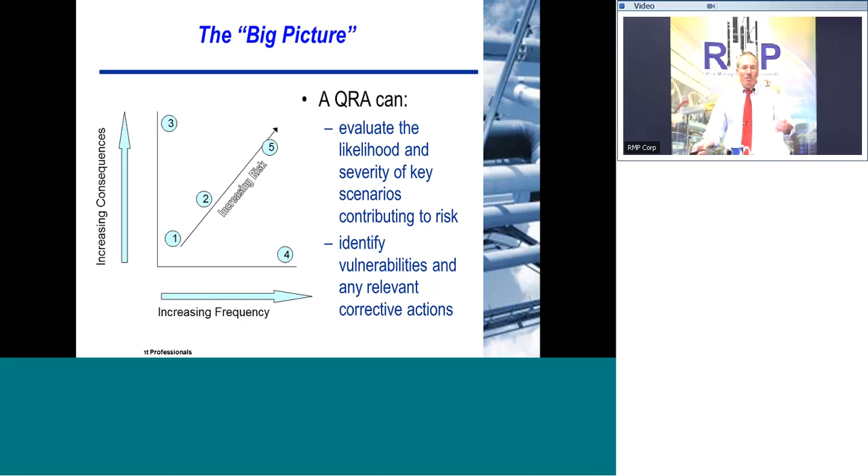So those are the key things that I wanted to impart. I also wanted to provide some additional information and references. Those are in the last two slides of your package.